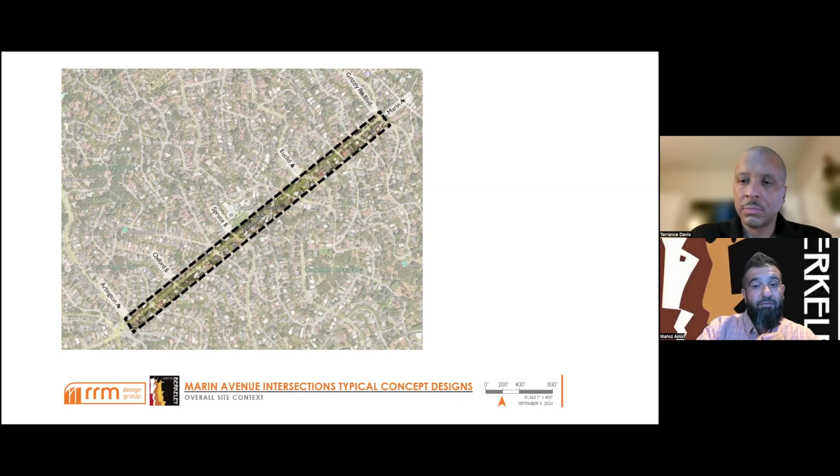So with that said, I will hand it over now to Hamid, who is our superstar transportation manager, who's been here for a long time with the city, to walk you through the next few slides. Thank you, Wahid. This is Hamid Mostowfi.

So in trying to achieve the goals that Wahid outlined, we took a holistic view of the entire corridor between Marin Circle and Grizzly Peak. And we think we have a number of ideas that will help improve safety.

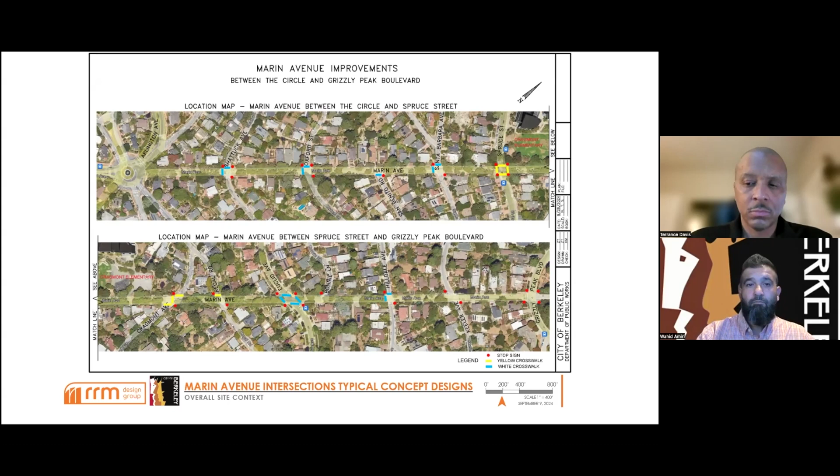So one of the very obvious things that we think we should formalize is prohibition of parking and stopping along the entire corridor. One idea is to paint the entire curb on both sides red, therefore formalizing the fact that no vehicles should stop at any time along that route.

The second idea we're looking at is, given that the width of Marin Avenue is about 26 feet, we can implement measures to narrow the lanes in both directions by painting edge line markings and cross hatch lines to reduce the through lanes to about 10.5, 11 feet in each direction. That helps give drivers the visual cue of a narrower lane, and typically these treatments do help in reducing speed.

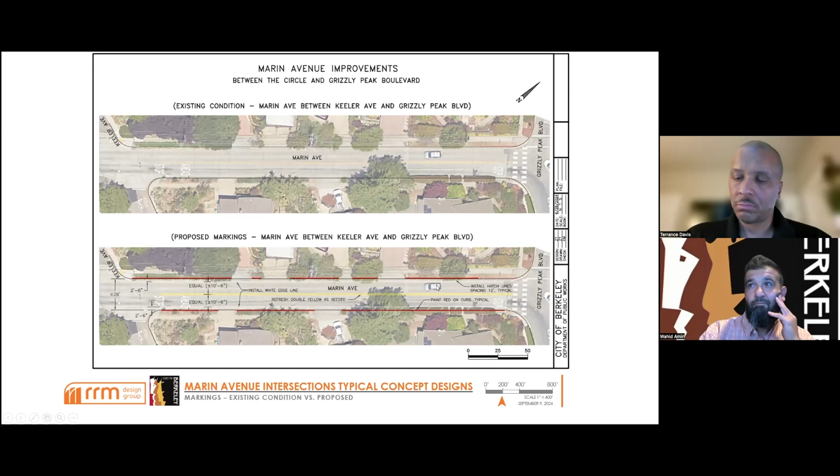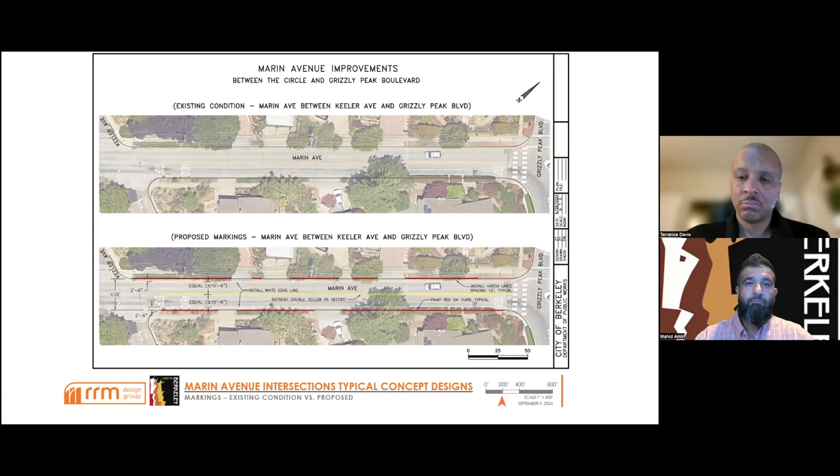A third element we looked at was the intersections throughout this corridor. There are some, and the majority of which are in the uphill direction, which do not have any traffic control. So we're planning, through the help of our consultants, to collect traffic data, volume, speed, and evaluate which intersections make sense for installing stop signs in the uphill direction.

For instance, at Marin and Oxford, to the left you see the present configuration, and if it meets the stop control warrants, then we're thinking of installing stop control in the uphill direction.

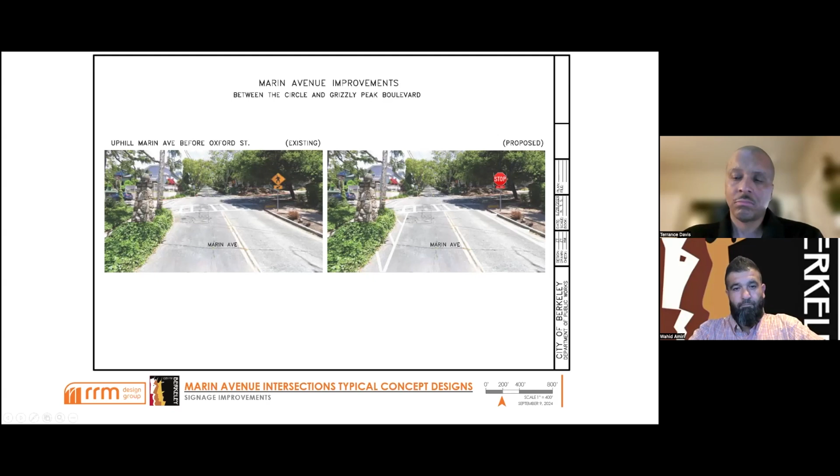A fourth element we looked at is how we could improve visibility, because there does appear to be sections of Marin Avenue where overgrowth and bushes are hindering sightlines. We're looking to work with our colleagues in the fire department to identify those areas and trim back, or in some locations, when warranted, remove some of the existing bushes. With that said, I'm going to turn it over to my colleague Colin in the fire department to go over some ideas they have about improving sightlines.

Actually, I'll take the next slides and then I'll hand it over to Colin. Okay, yeah, thank you. So thank you, Hamid.

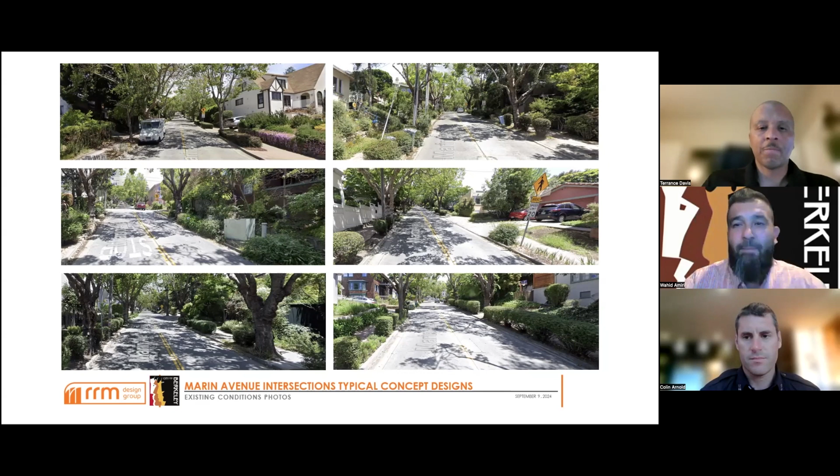As part of this project, we are also focused on improving safety by enhancing the line of sight and visibility. As you can see from this slide, the current conditions are quite congested with overgrown vegetation, which makes visibility significantly challenging.

With support from our fire department, Colin who's here, and our friends at the Parks, Recreation, and Waterfront team who couldn't make it tonight, we've been collaborating, along with our consultant landscape architect, to develop two options. We'll walk you through these options, then bring in Colin to discuss fire control and management along the corridor.

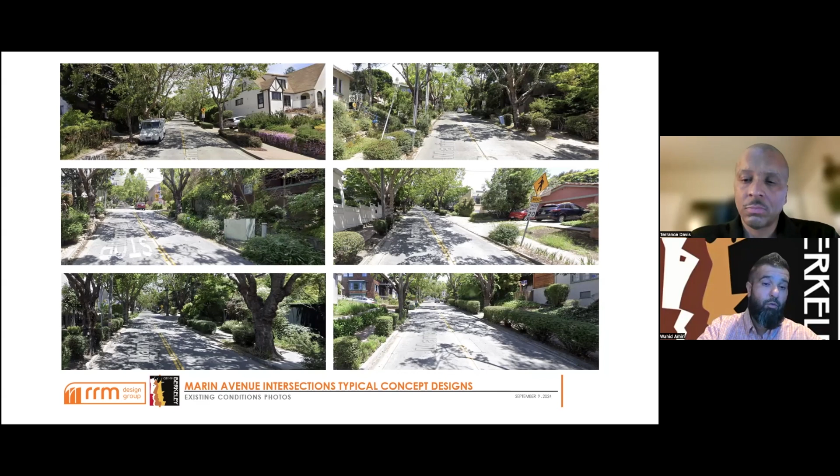The first is the replant option, based on our fire department's fire safe plant palettes. This is one option we're proposing for enhancing safety and increasing visibility and line of sight. It's low maintenance and uses native, regionally adapted plants.

For this option, if community members choose to go with it, we will need community agreement and commitment regarding a watering program and some mild maintenance program.

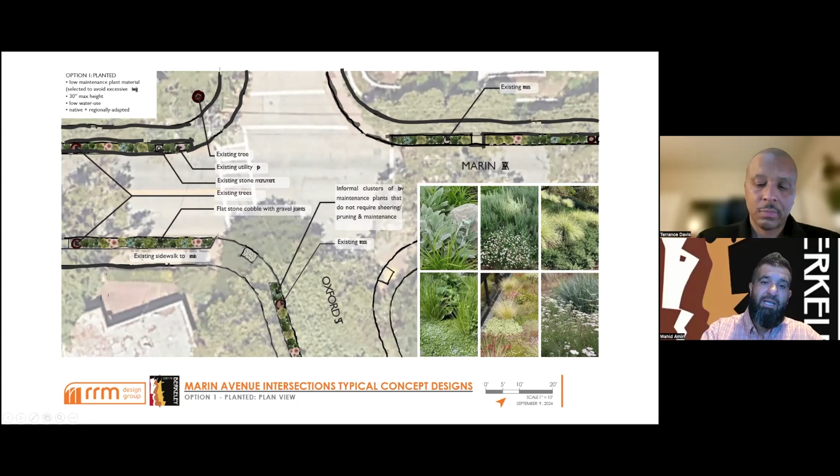Here's a picture of how it looks right now. The next slide is an overlay of option number one, the planted. You can see the road profile, the face of curb, and then the new vegetation or plants would go into that strip, followed by the sidewalk.

We are utilizing an approved fire department list of vegetation for various reasons, and the maximum height here, once fully grown, would not exceed 30 inches. That way we don't have to continuously battle line of sight issues, and hopefully we can get this corridor to be safe from that perspective once and for all.

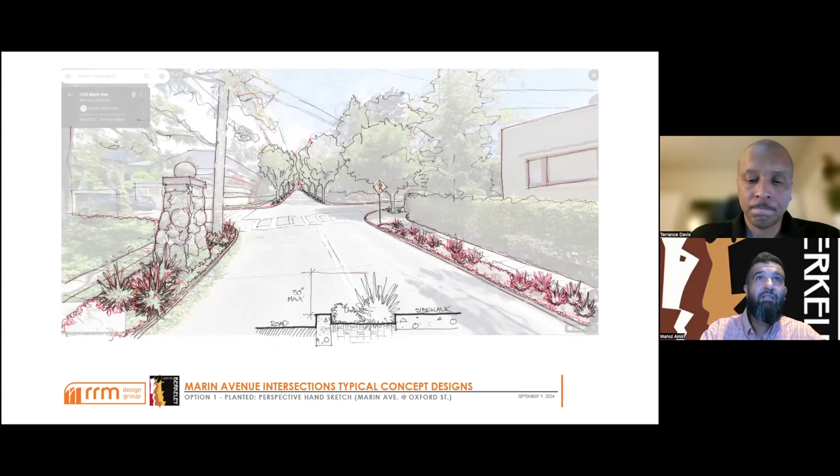I'll leave it here for a couple more seconds so people can take a look before I move on. By the way, we'll put a quiz at the end of the presentation about the vegetation types and names. It's a joke.

Option number 2 is the hardscape option. As you can see from this plan view, the goal here is to achieve good aesthetics. We're proposing the use of natural stone and boulders to enhance aesthetics with minimal maintenance.

Of the two options, this one is a little costlier, but given the steep slopes the Vice Mayor mentioned earlier, we're going to use angled stone to prevent rolling down the hill. This arrangement will also be friendly to our stormwater management plan and regime for the city, but it is going to be a bit costlier. This is what it would look like with the boulders and angled rocks.

This slide gives you some ideas and options that, as I mentioned, we'll work through with the community and vet through whatever the decision is.

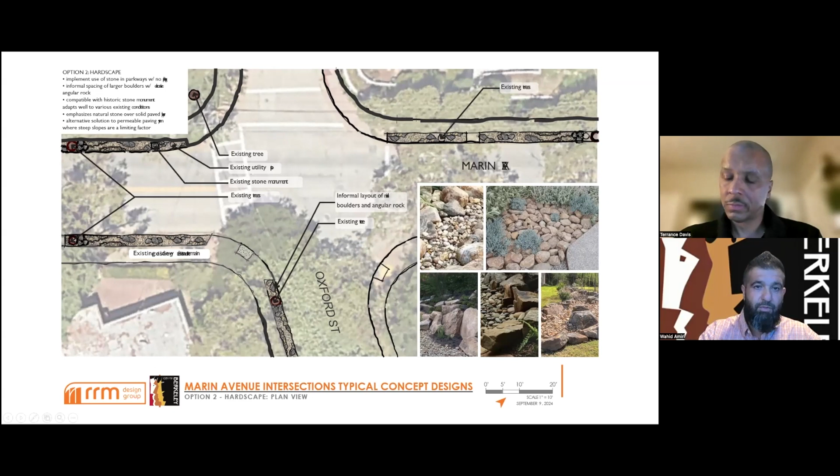Here's the current photo of that section of the corridor, and an overlay of how it would look with the boulders and angled rocks. Again, your road profile, face of curb, boulders, big pieces, angled stones, and your sidewalk.

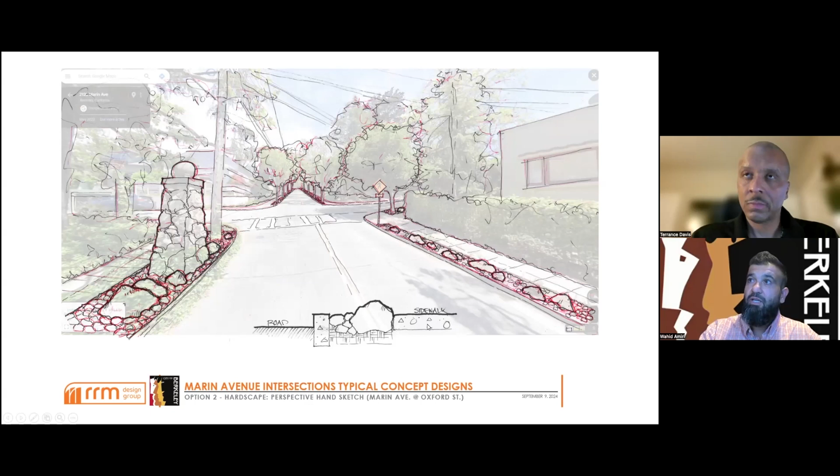As we display this slide showcasing some of our recommendations for the plant selections, I'll turn it over to another superstar from our fire department, Colin, our interim assistant fire chief, to discuss the vegetation management efforts that will take place along the whole corridor. Our project will focus on intersection specific areas up and down, but our friends at the fire department look at this more holistically and have a lot more involvement with vegetation management. So with that, Colin, I'll hand it over to you, sir.

Thanks, Wahid. And for the record, you have no idea whether I'm a superstar or not, but I was ready to handle all of those slides.

Hey, good evening, everybody. Colin Arnold, I'm the Assistant Fire Chief in charge of the Wildland Urban Interface, which is Fire Zones 2 and 3. That's really everything east of Shattuck in some areas and Spruce and others, but all of Councilmember Wengraf's district.

Public Works approached us about this project for a number of reasons, but one of the happy circumstances is that we also have a CAL FIRE grant lined up to do evacuation route clearing, and Marin is one of the targeted streets for that. So this created a pretty good opportunity for us to tackle two issues at the same time and address issues on Marin all at once, rather than having to close sections of it multiple times for different reasons.

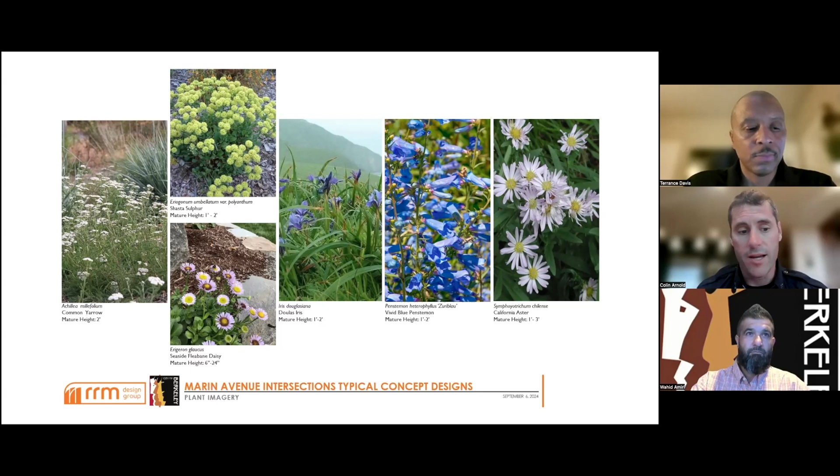If there's any questions, I'm here for you. I look forward to answering whatever you may have.